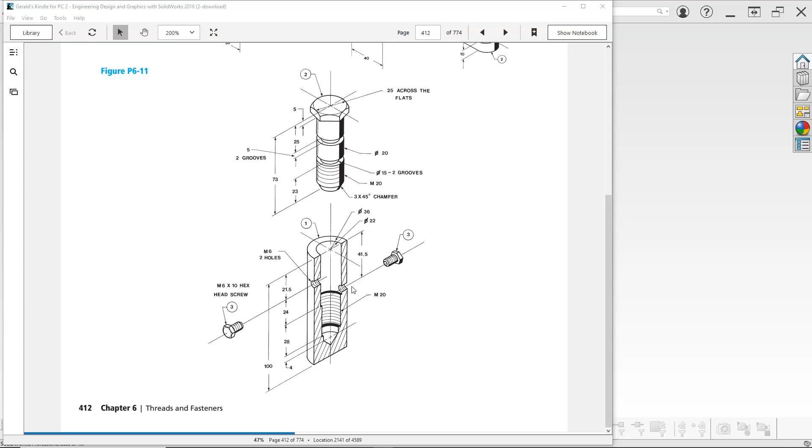And speaking of planes, when we come to the hole wizard, we'll look at one of these in the 3D sketch, and we'll look at one of these as making it with a plane and our geometry. So let's go ahead and get started.

We're going to pull up a standard part. If you have created your metric part template, then go ahead and use it. Switch over to millimeters, grams, and seconds.

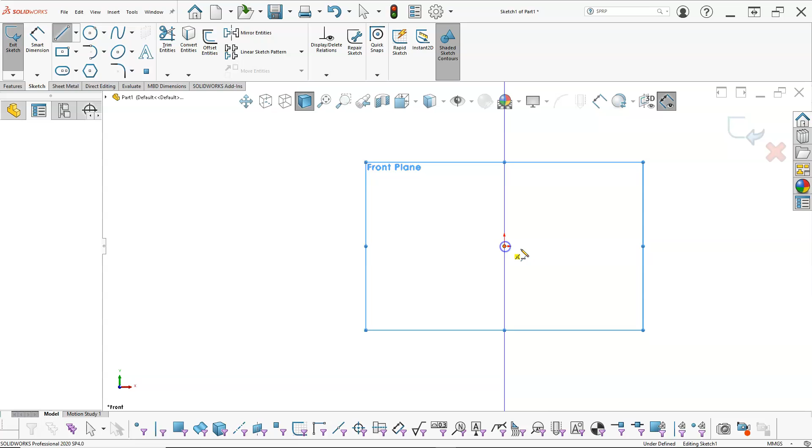I'm in the front. Anytime I'm doing the revolve, my first instinct is to insert a center line, vertical, infinite length. We place that on the origin, and it doesn't really matter if you start at the top or the bottom. So we'll bring this out, up to if you want to include the chamfer in the sketch, or add it as a feature. I could also use the jog line to create these little notch outs.

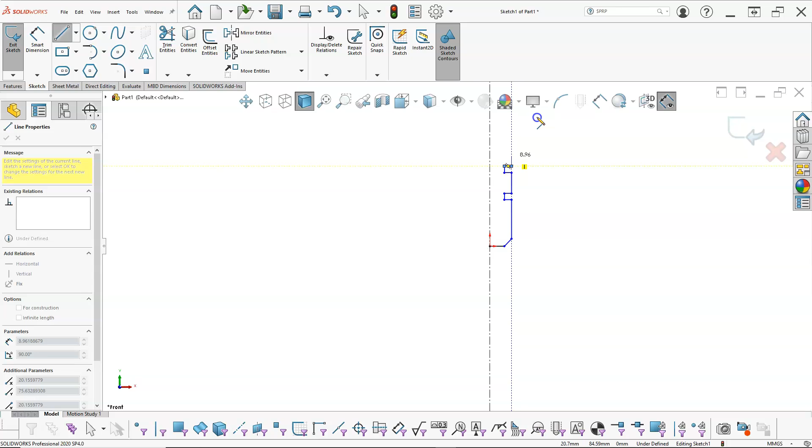And we'll zoom out just a little bit. Alright, and I don't want to include the hex. That's going to be an extrude, boss extrude at this point. Turns gray, which means that I got it successfully closed in.

I'm going to control select, got a midpoint, so I'm going to bring those out and make them collinear. Both of the undercuts are 15 millimeters, so those will also be collinear. Or, just to run back through the relations, if I was to pick a point in a line, that would be coincident, and if I was to pick 2 points, that would be vertical. So any one of those will work. I'm just kind of staying consistent with the collinears in the way that I read the relations.

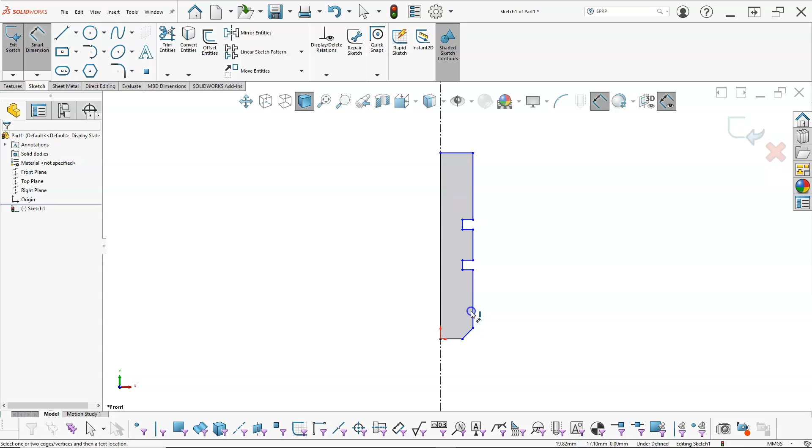All right, so we have 20 millimeters on the body. We have an overall of 73 to the top. So minus 5 will give us 68.

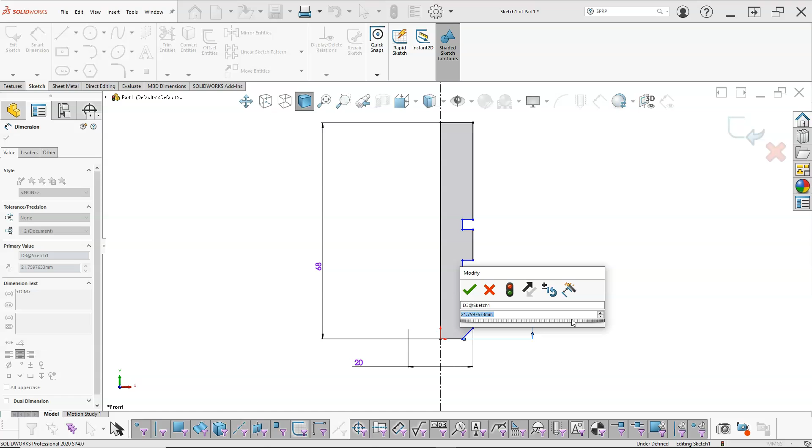From the, well, we're going to end up doing some math here, so let's include a little bit of geometry to help with this calculation. So, doing the bottom one was 23 millimeters from the face.

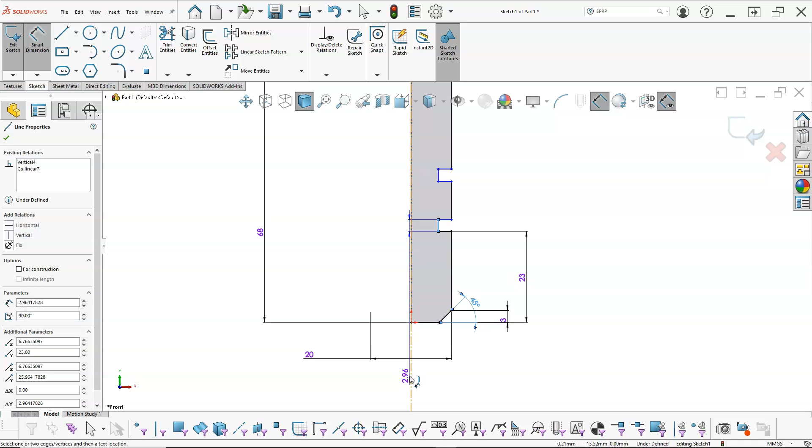3 millimeters for the chamfer. We're going to go 45 degrees off of the bottom of the part. 15 millimeters on the undercut. And then, since I'm in diameter, I'm going to see that little icon. If I recognize it, I can hit escape, or if I apply it and get the diameter and didn't really want it, I can hit escape on the keyboard, and that will bring me back.

5 millimeters on the groove, 5 millimeters, 2 grooves, huh? And they're putting an M6 in there. Yeah, I don't know about that one. We'll have to see how those fit.

All right, so design intent is that both of those will be 5 millimeters, so we'll set them to equal. That way, if I do need to make a change, I can change one dimension and get both of them.

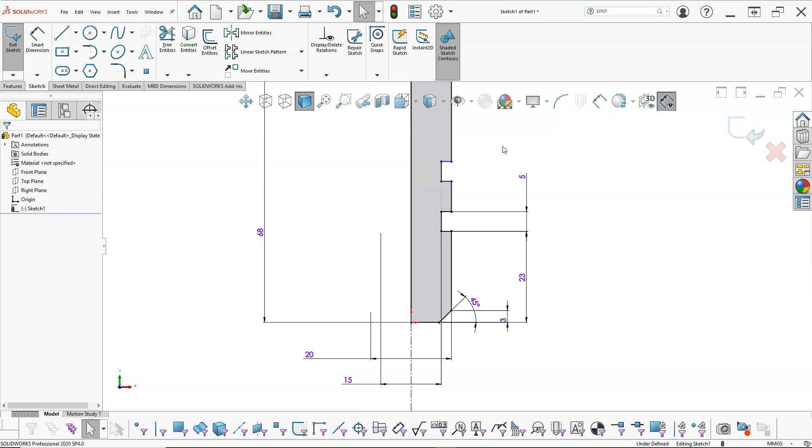So I'm just going to create another center line, make the endpoint coincident, and then set it 5 millimeters from the top to mimic the head.

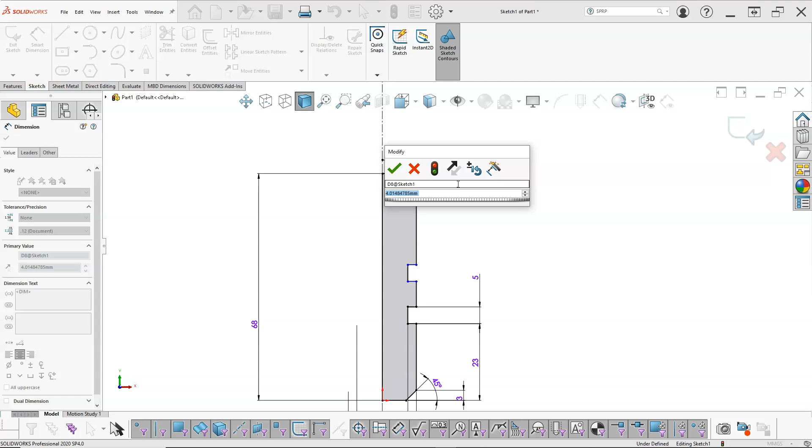Alright, so on occasion I've been able to grab the handle and reposition. Most of the time I would just go ahead and delete it and reapply it. So 73 from the top, 5 millimeters down to the head, 25 millimeters now from my head reference to the top of the groove. That gives me the geometry.

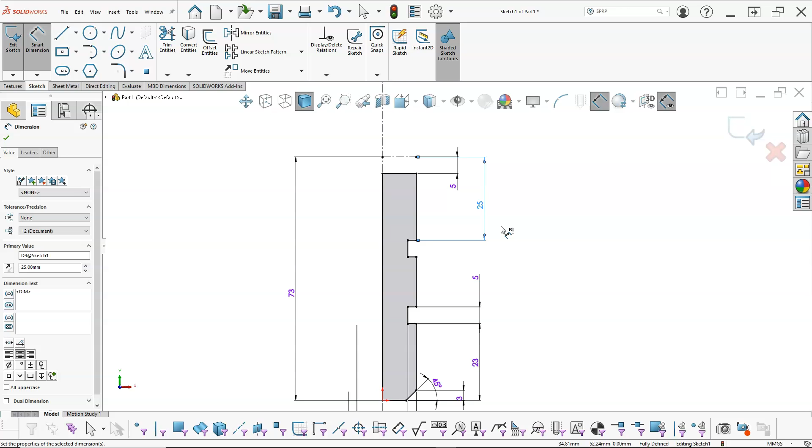You can do the math, and really, if we're designing this off of the top of our heads without reproducing a model, I'm going to build this in what makes sense and dimension it in what makes sense as I'm going through the process. So I have my fully defined sketch. I'm going to go into features and revolve, or if you added it to the customize, which this one's not really squaring itself out.

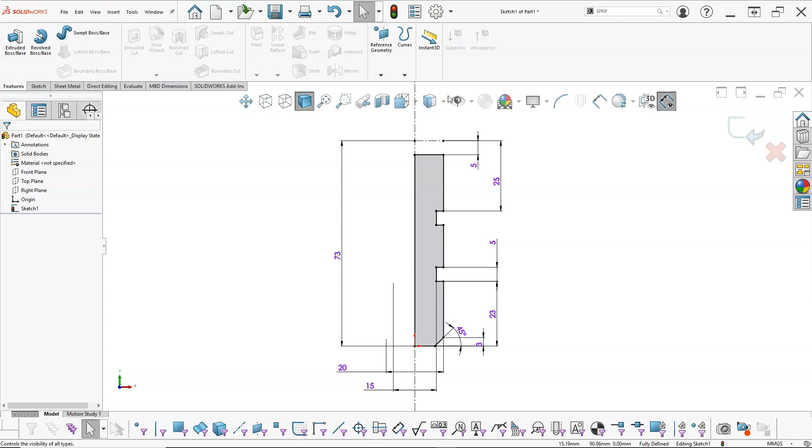There we go, let's go that route. Once you're in the customize menu, you can drag this around a little bit and make it more functional. Alright, so I want my revolve.

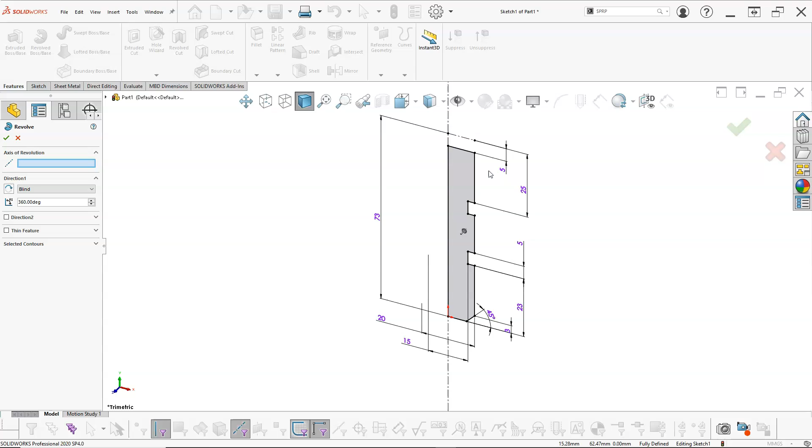If you haven't created that one, just go up to the command manager and revolve. Now we're in a situation where I have two center lines. If I were to pick this one, it would create a revolve around the horizontal, but I want it revolved around the vertical, so we go ahead and make that pick.

I want a 20 millimeter cosmetic thread. So we can go up to Tools or Insert, Annotations, Cosmetic Thread. If we customize and drag one out, or go over to the commands and start to type in cosmetic thread, that will take me into the loop.

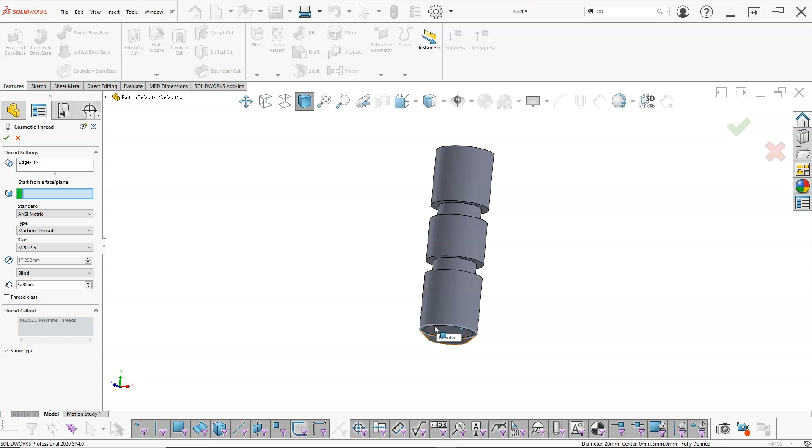We're going to pick up an edge, and the type is machine thread. The other option was a pipe tap.

Haven't done too many M20s, so let's just go with a 2 millimeter. 2.5 is about 100 thousandths, so that would be fairly coarse. 2 millimeters is about 80 thousandths. Since I think in thousandths of an inch, I always do that quick conversion, to think about what I'm telling it to do.

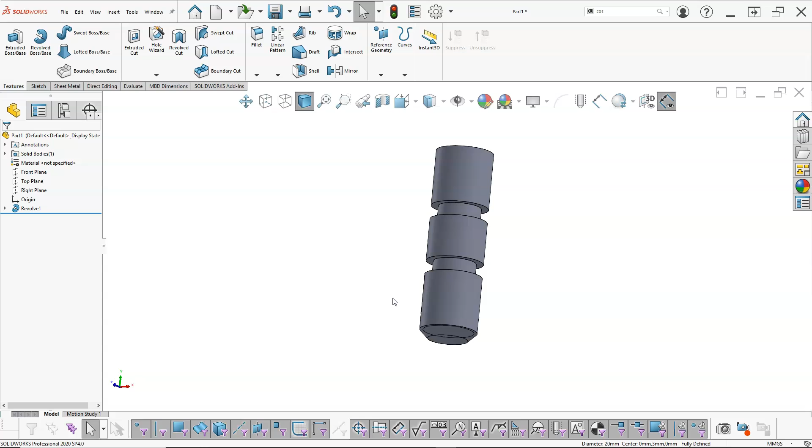Up to next, we'll go to the undercut, which is fine, and we'll go ahead and accept. I'm going to kind of see the minor diameter in the angle, but when I go to the front, then I'll be able to pick up those geometries.

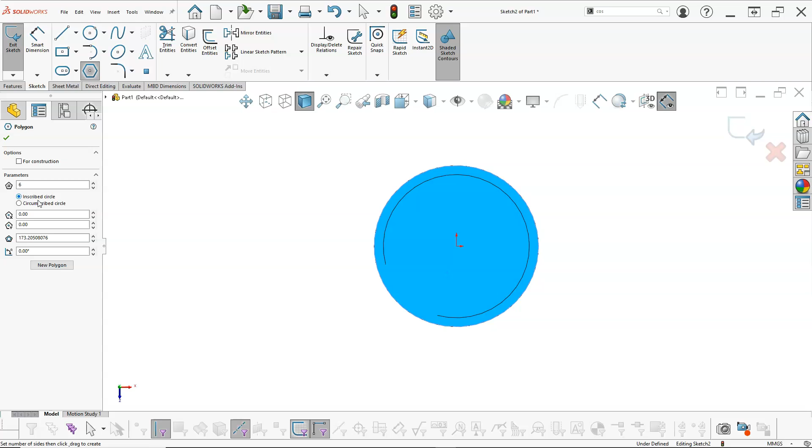Alright, so on the top plane we'll open up a sketch and go into the polygon. 6 sides is already there. Inscribed is the interior, circumscribed is the exterior, so touching on the flats versus touching on the points.

Alright, so if I grab it this way, it's not really going to make that big a difference, it's just going to be in my choices. I'm going to have a harder time generating that little angle on this side.

But as long as one of the axes goes through, in this case what would be the front or the right plane, then we'll have the same result. So selecting the origin, selecting a point, we'll make that horizontal.

My across the flats is 25, so the inscribed circle. Okay, find a place to place that. There we go.

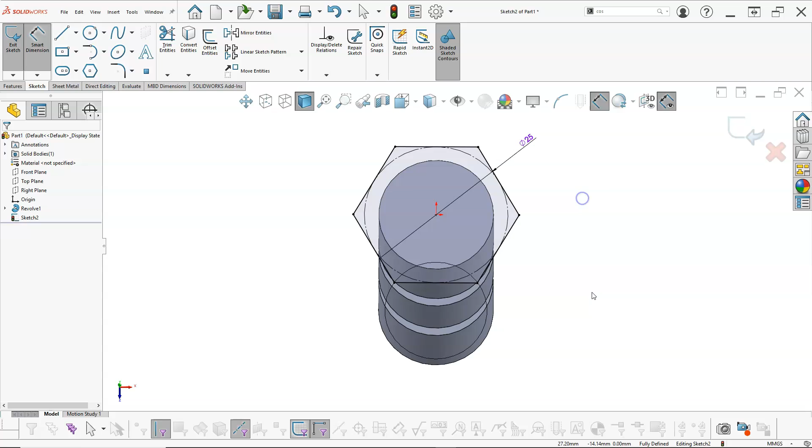And then, if I wanted to, we could show the sketch, and that gives me a location from that original sketch to drive up to.

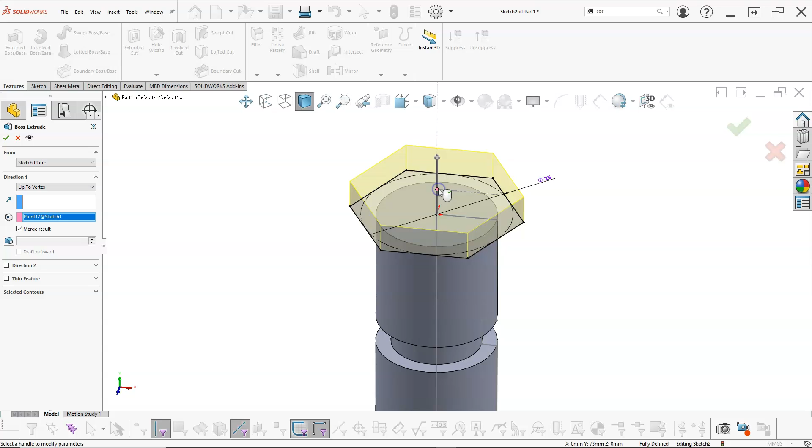So features, extrude, and this would be a place where I could use up to vertex. That endpoint represents vertex and gives me the geometry.

Alright, so that's looking pretty good. We need to put the angle on. And there's nothing wrong with just telling it to do the extrude to 5 millimeters and ending up with the same result.

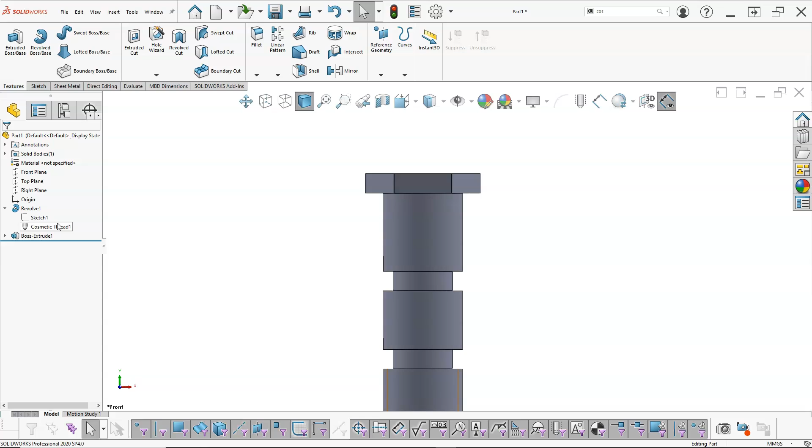But going back to some of those techniques in the multi-body and the top-down approach, we're trying to be able to find a single location to make these adjustments from.

Alright, so we go into the front plane. This is going to be a cut revolve. So center line, vertical, infinite length. We'll set it on the origin, it goes fully defined. I'll do L on the keyboard.

And we'll draw our angle. There's no specific dimension given, so we'd either assume maybe 45 degrees or 30 degrees. Let's go with a 45 degree.

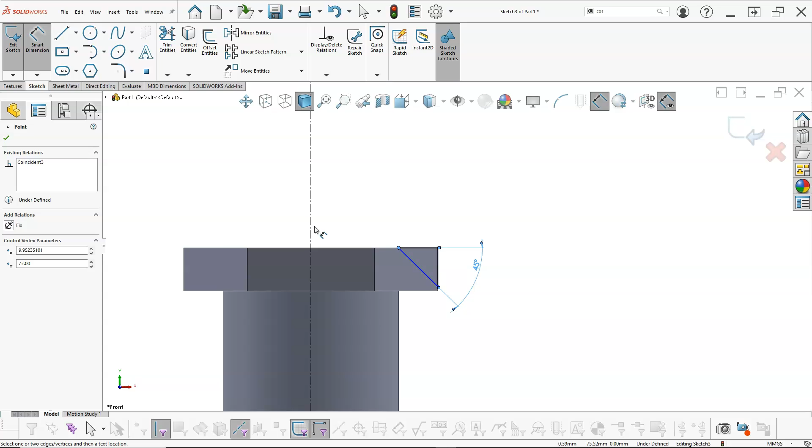That'll look pretty good. And if I go to the diametral dimension, I want it to disappear when it comes around to the flats. Okay, so that's going to cut the... well, I'm going to have to see.

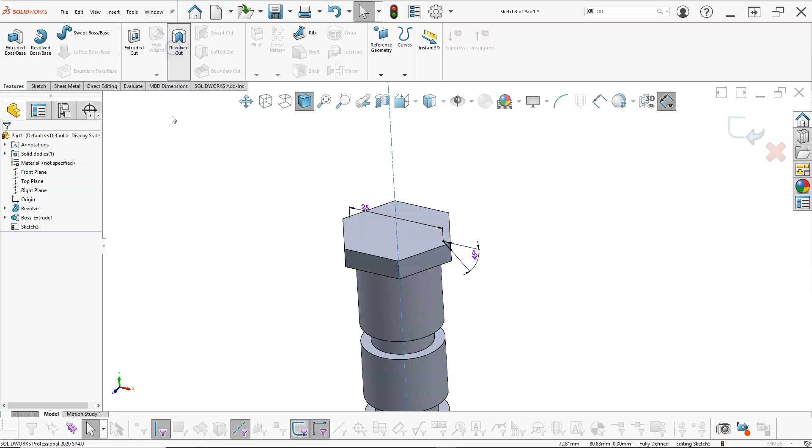I may have taken a little too much. No, it'll disappear at the flat. So feature, revolve cut, accept. Now we have the angles at the outside.

Alright, so that gives me all of my geometry that I need for this part. Let's go ahead and save. We're going to go back up, create our new folder, P6-11.

And we have another screw type, so we'll go ahead and give it a name and do one quick check. I think we're good.